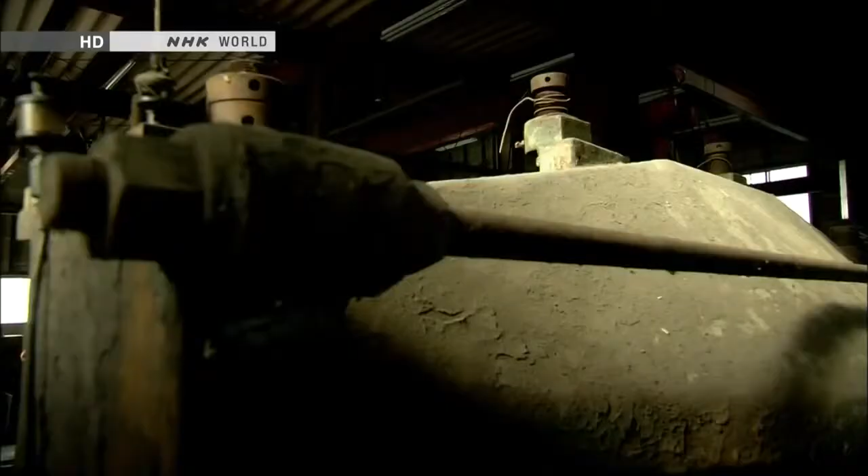In a workshop near Mount Fuji, a curious being has appeared. It's 3.8 meters tall and weighs 4 tons. It is a giant humanoid robot named Kuratas.

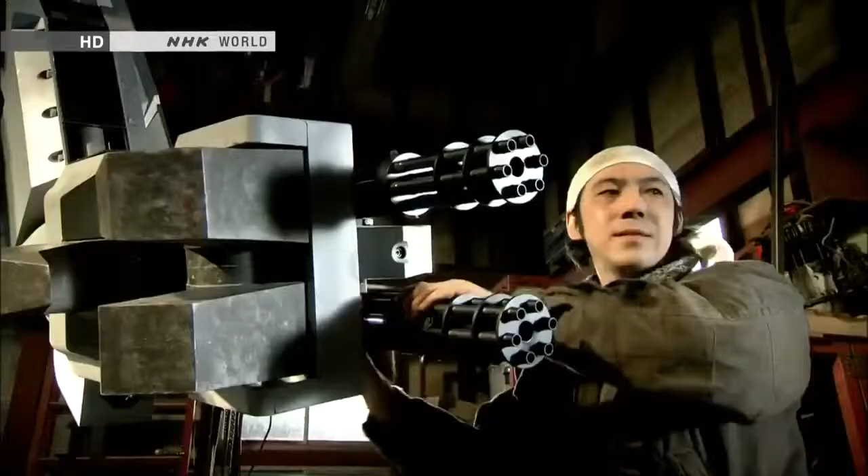Kuratas is a contemporary artist's creation. He holed up here for 2 years, building the robot with input from an expert.

He calls Kuratas a work of art, but it's a sophisticated piece of machinery. A person seated inside can control the robot, move its limbs, and grab things.

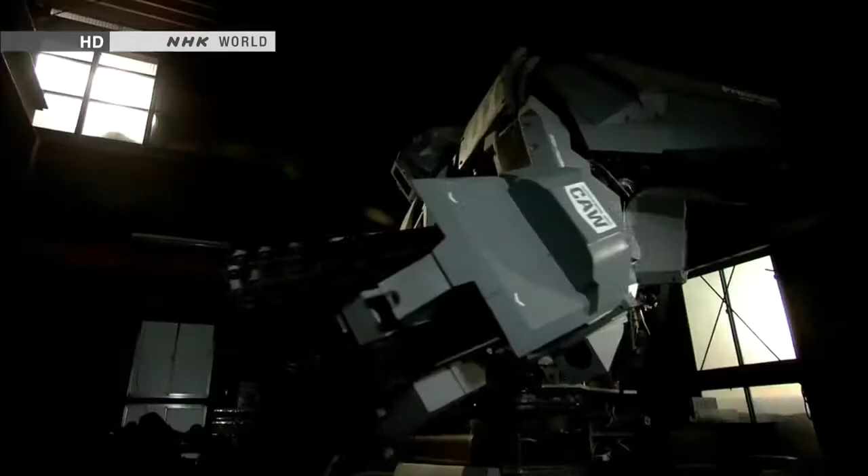The artist says he was inspired by robots in science fiction tales and animation. That vision sustained him as he worked in solitude.

Things that were once unthinkable are becoming real. How will robots evolve? Well, military applications could be one option. They'll probably become more and more like humans. They could surpass us in strength and ability.

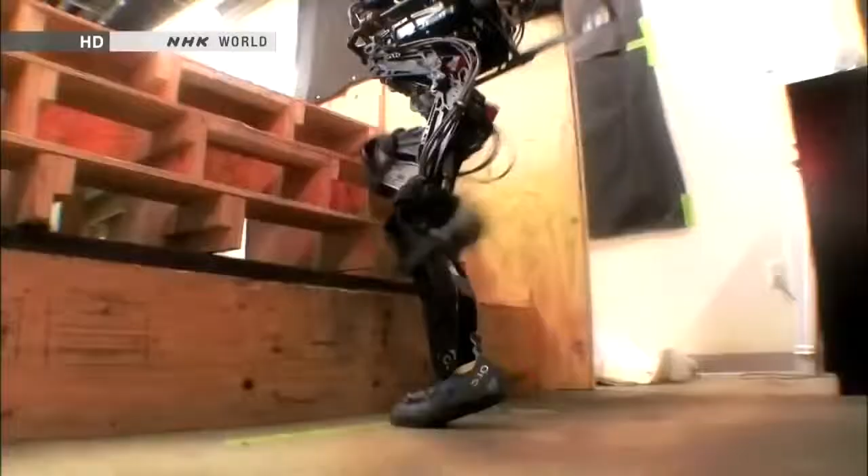People long dreamed of creating these extreme machines. Now, humanoid robots are here. They think like we do, move like we do, and even sacrifice themselves for us.

We want our robot to change society, because robots must be useful. Electronics and computing, progress in vision systems, there's many pieces of it. We will see much more capability continue to grow.

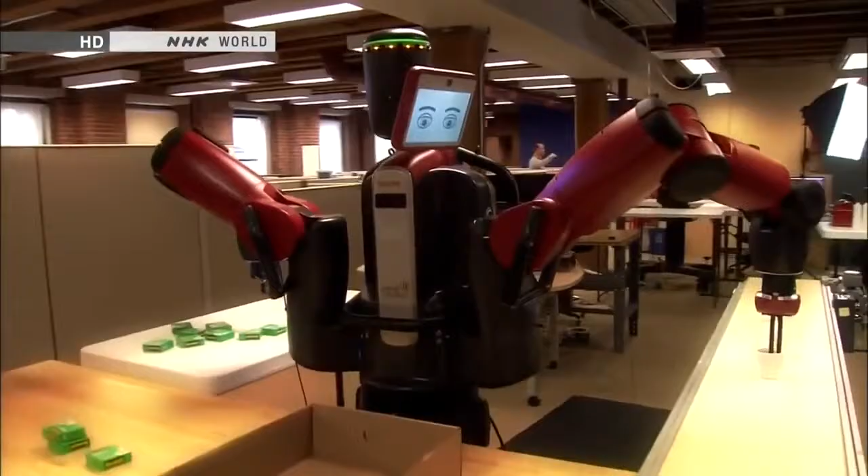Since the Industrial Revolution, people have entrusted some jobs to machines. But there may come a day when humanoid robots do much more complex jobs. Then, what will people do?

You'll see more and more robots doing things in society, whether it's manufacturing or service applications or home healthcare applications. The key will be skillfully dividing labor between humans and humanoid robots.

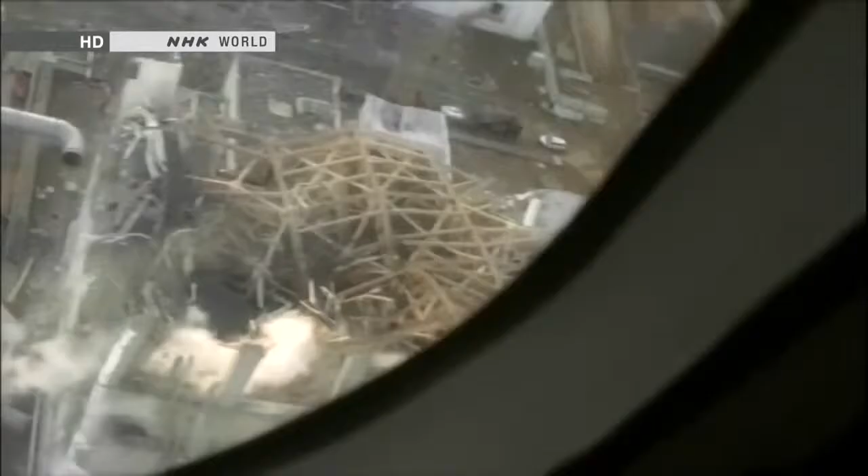The disaster that hit Japan in March 2011 accelerated efforts to develop robots with human traits. The Fukushima nuclear accident left people powerless.

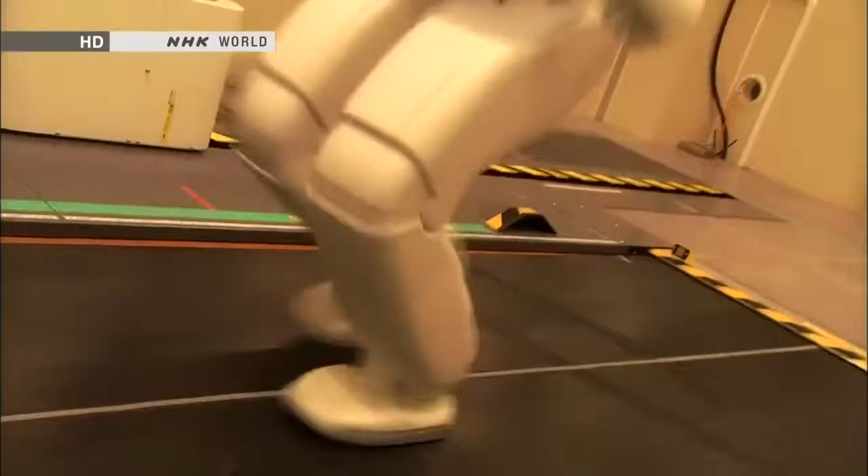Robots can take over when things become dangerous. They can plow through rubble, climb ladders, even make repairs. People are turning to humanoid robots to handle all of these tasks.

We're eager to launch it soon to end the crisis. By joining forces, we can make a truly useful contribution.

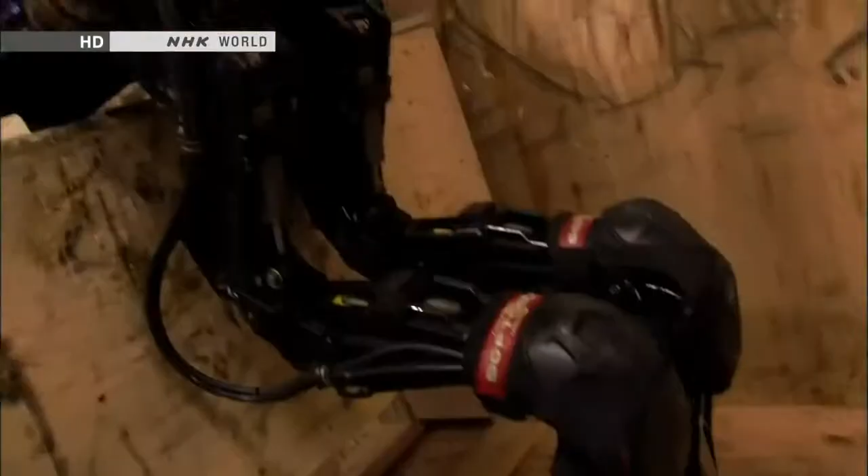Only a humanoid could do it. The day will come when robots will really assist mankind. The nuclear disaster in Japan sparked explosive advances in humanoids at the front line of robotics development.

This program explores the future that's fast approaching.

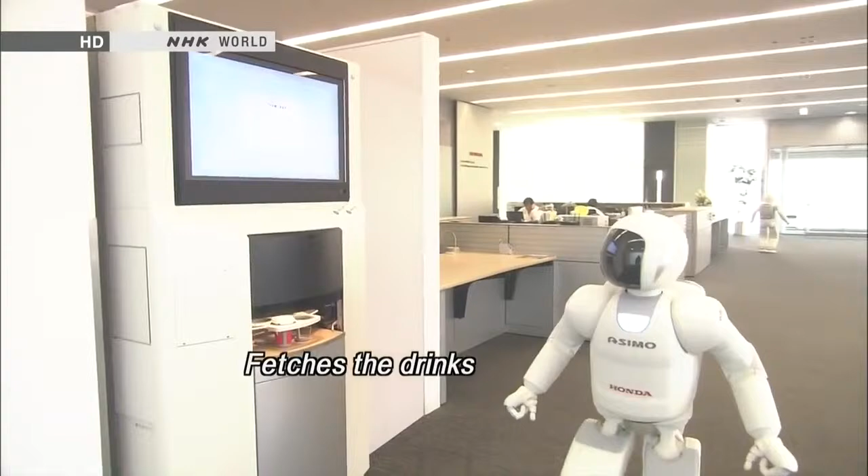Asimo was created by Honda's research and development subsidiary. We were allowed to film their top-secret robotics laboratory.

Japan is a worldwide leader in the development of humanoid robots. Asimo is the country's crowning achievement. Engineers continue to make improvements.

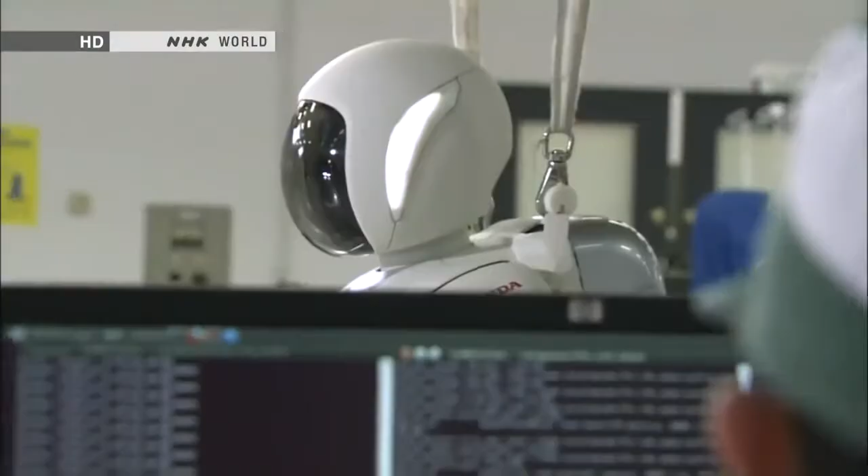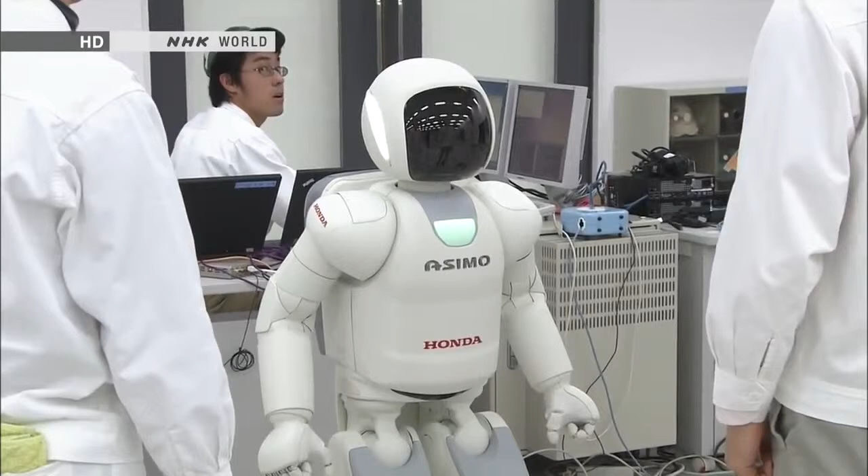Asimo's most innovative feature is its advanced intelligence. The robot can think and act on its own without human intervention. That's made possible by sensors that replicate our 5 senses.

Asimo's head contains 8 microphones. It uses them to listen and engage in conversation.

Asimo's artificial intelligence analyzes a vast array of information. That's how it understands people's requests and takes appropriate actions.

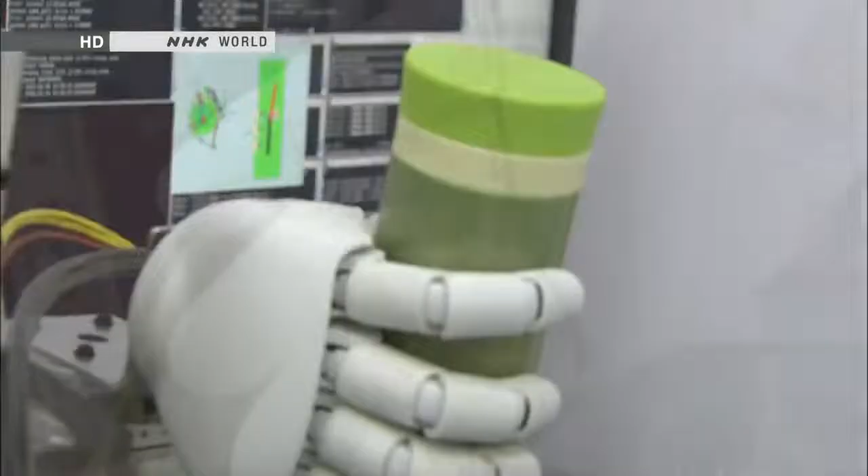Asimo also has a sophisticated sense of touch. Its fingers can make subtle movements, like a person's. Sensors are embedded in the fingertips, too. They can gauge the hardness of an object, like human fingers do.

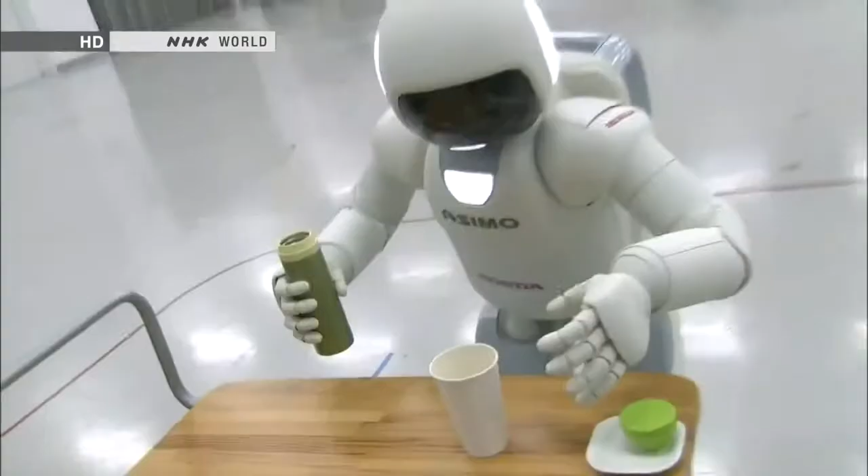Most robots use a fixed amount of strength to grab things. But Asimo exerts more power to open a tightly sealed water bottle and less when holding a paper cup. Its artificial intelligence uses information from the fingertip sensors to adjust the grip.

The developer's ultimate goal is for Asimo to be a valuable partner that coexists with humans. The engineers who created Asimo all grew up watching animated shows about robots, such as Astro Boy, Doraemon, and Gundam. They dreamed of someday making their own.

Satoshi Shigemi is the development team's leader. He has been designing robots for the past 16 years.

From the beginning, we wanted to design a robot that could help people. To realize that dream, we're constantly asking ourselves, what kind of robot would be able to change society, make people happy, and make life easier for people around the world?

Our idea is to create a robot that will change how people live. We're working through the technological issues, one by one, in order to reach that goal.

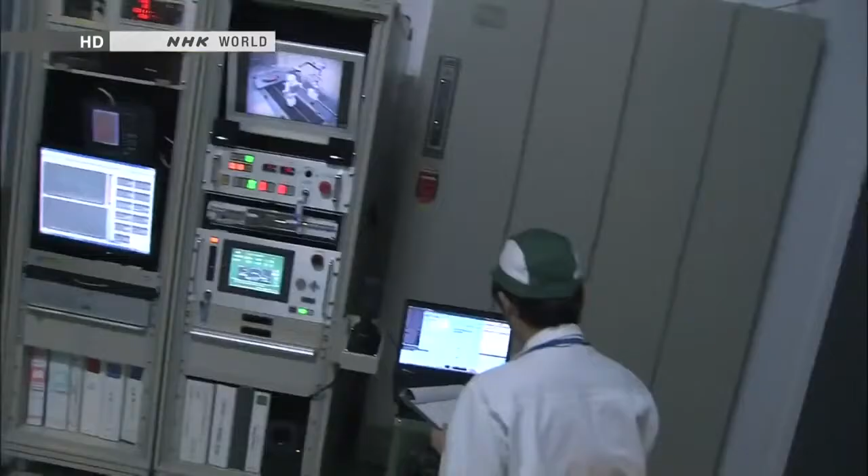Asimo's advanced physical capabilities are revolutionary. The robot can walk and run. It can reach speeds of up to 9 kilometers an hour.

For robots, walking is much easier than running. When running, both feet momentarily leave the ground. Balancing in midair is no easy task.

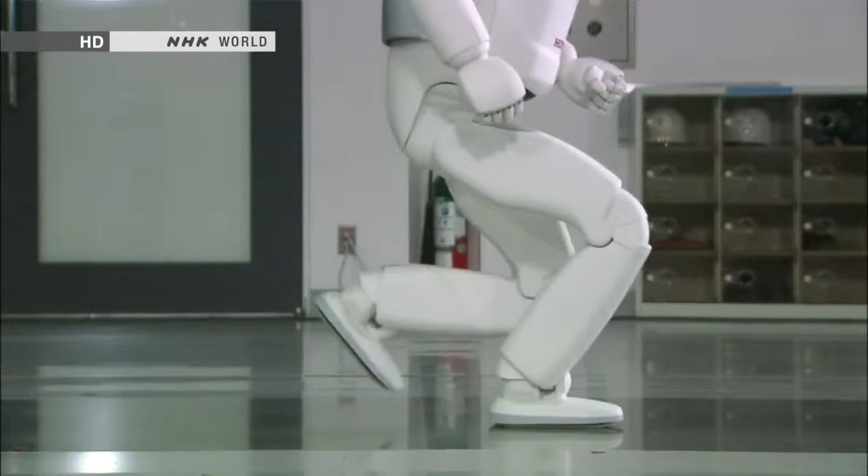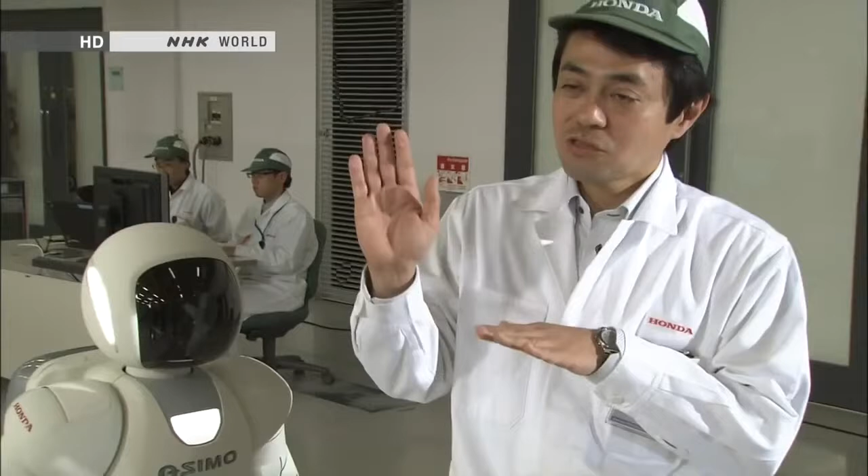Maintaining posture while jumping or floating in the air was a major technological breakthrough. Asimo leans its upper body slightly forward to maintain overall balance. It goes forward straight in the air.

Sensors in Asimo's waist measure the robot's angle. It leans slightly to compensate, forward or back, side to side. That's how it stays perfectly balanced in the air.

Asimo has been evolving ever since development began in 1986, much like a growing child. But something happened that made researchers realize Asimo's real-world limitations.

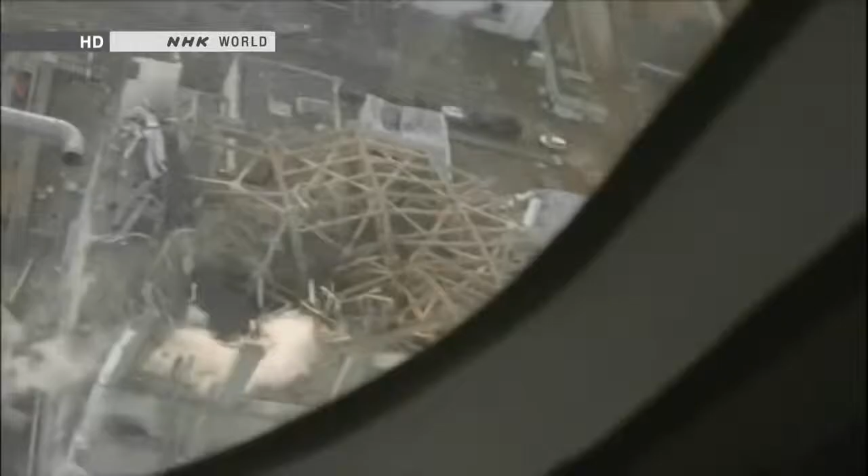It was the accident at Tokyo Electric Power Company's Fukushima Daiichi nuclear plant. The damaged reactors released radioactive substances, making it difficult for humans to deal with the crisis. People needed something that could confront the dangers and bring the plant under control.

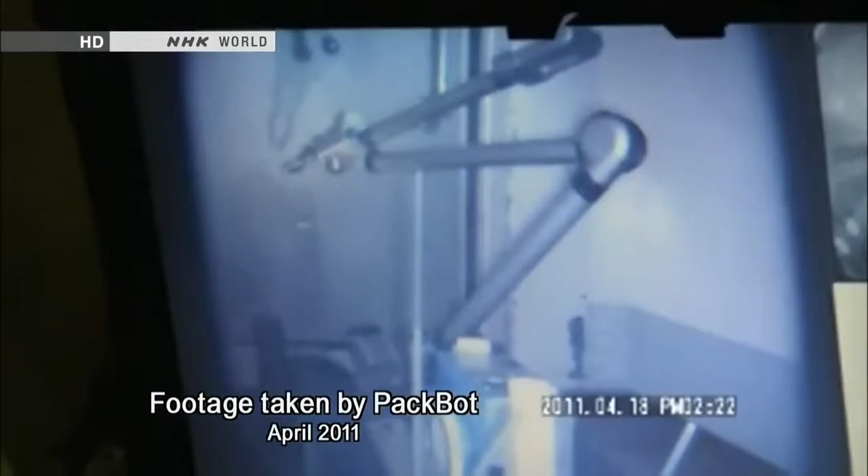Robots. Japanese officials sent a request for robots developed by the US military. The robots were sent to Fukushima in April 2011. They recorded images inside the damaged reactors.

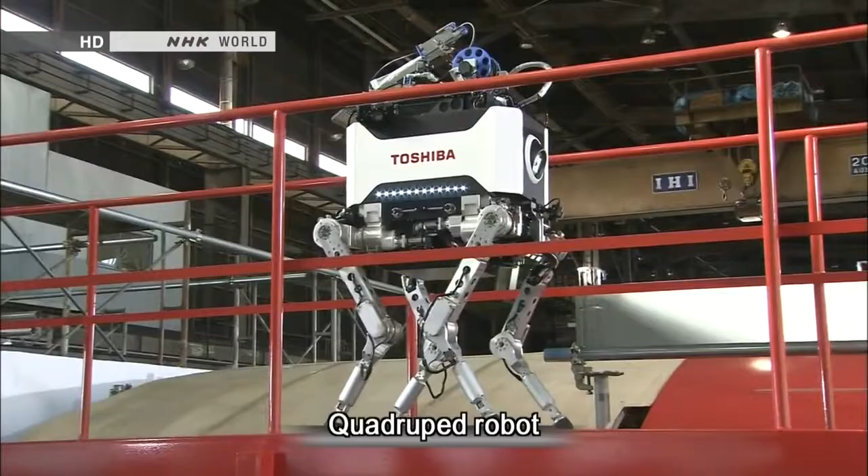Since then, a variety of Japanese robots have been enlisted as well. Robots have proven to be useful, but 2 years after the accident, they're only used for inspections. They're not able to do all the work of humans.

What about Asimo? Right after the disaster, people flooded Honda with phone calls and emails asking the company to send Asimo to the Fukushima plant.

But Asimo wasn't up to the task. It could move nimbly over an office floor and other flat surfaces, but large vertical gaps and obstacles were a different story.

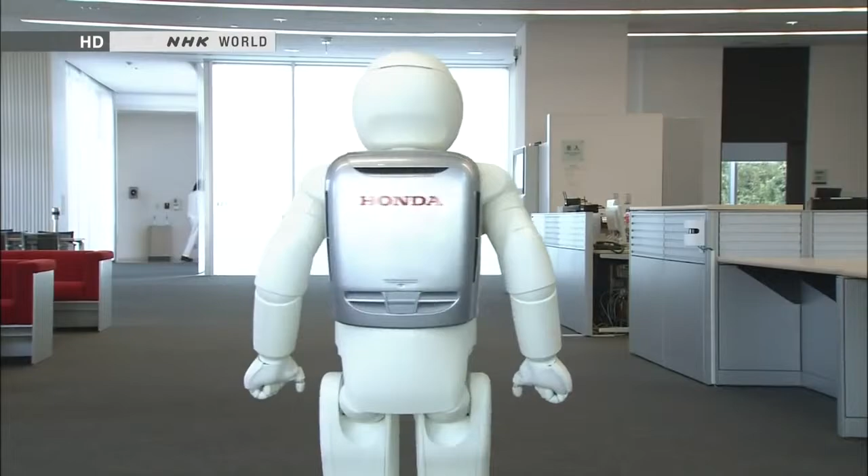We heard from many customers. We ourselves regretted that Asimo couldn't be of help. It was obvious that Asimo we had built wasn't ready for real-life action. We realized right away that we needed to make something different, something new that could offer immediate assistance.

Honda wasted no time. Company officials offered to create a robot free of charge to assist TEPCO in the recovery. TEPCO accepted. Officials asked for a robot that could open or close valves inside the nuclear plant.

We wanted to flush out radioactive materials that remained inside the pipes and bring down radiation levels in the facility. That was our first goal. Unless we opened or closed the valves, the area would remain highly radioactive, and that would prevent workers from entering the facility and impact the entire decommissioning schedule.

How many valves are there? Each unit has from several thousand to tens of thousands of them.

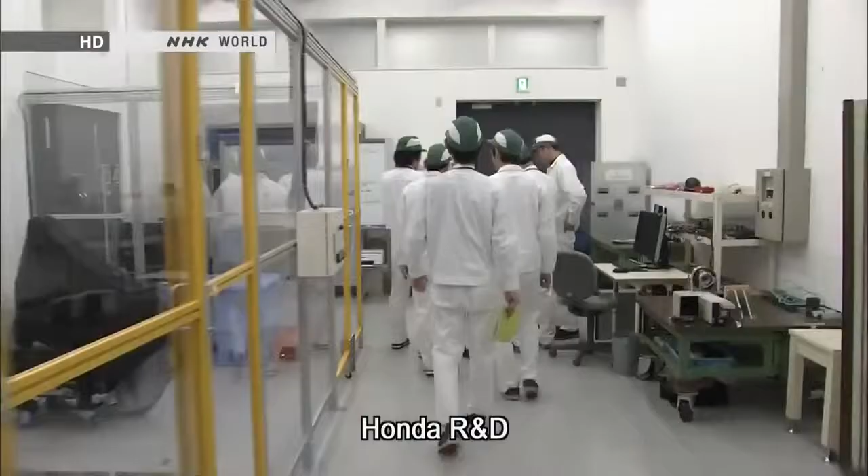In July 2011, 4 months after the accident, Honda began designing a robot for use at the nuclear plant. Members of the Asimo team were put in charge of the project. A humanoid robot would take too long to build, so engineers focused on making a robot specifically for operating valves.

Asimo was crucial to their efforts. Its ankles employ advanced balancing technology. Developers reasoned that using it would allow the new robot to work inside rubble-filled reactor buildings.

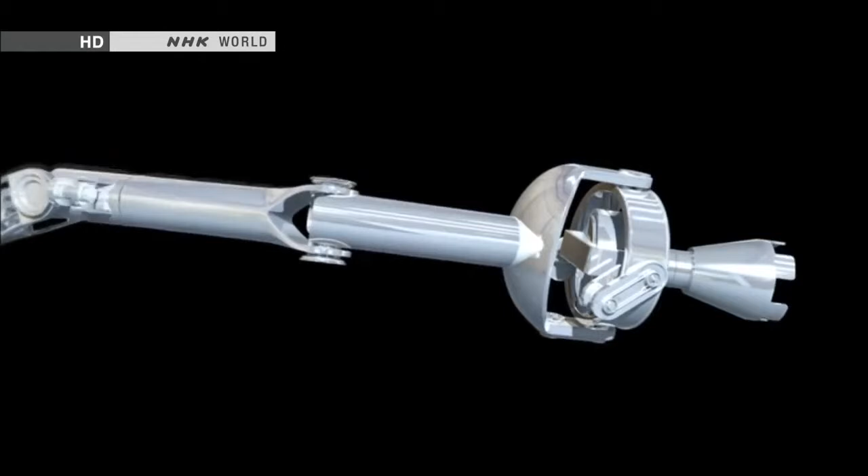The team worked exceptionally fast, completing a prototype in just 4 months. They turned Asimo's leg into an arm for operating the valves. Even when the base moves, the arm remains steady.

So far, so good. Officials from TEPCO evaluated the prototype at the National Institute of Advanced Industrial Science and Technology. The government-backed group for cutting-edge research contributed to the development effort.

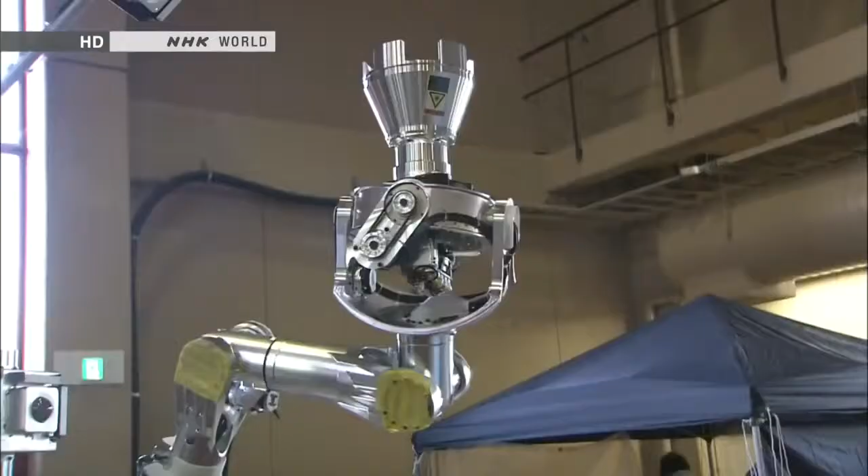A TEPCO official couldn't take his eyes off the robot's movements. We may be quite demanding. That's okay. We might be quite direct. The test is designed to replicate conditions inside the nuclear plant.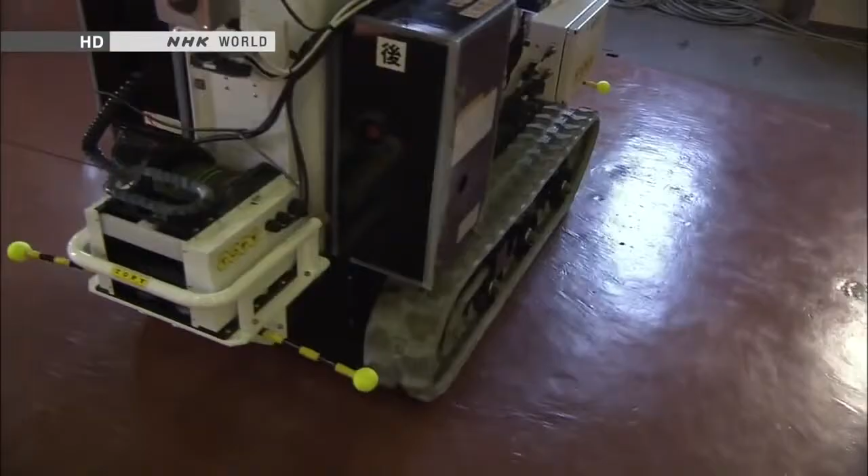The robotic arm is remote controlled. Testers send the arm toward one of the valves. There are a number of unknowns, including the condition of the valves. They may have rusted since the accident. A valve might break if the robot applies too much force, or it might not budge at all.

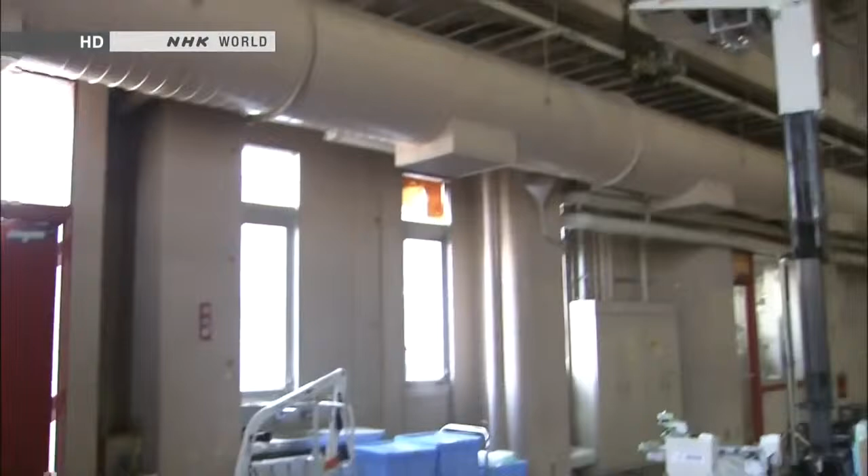The robot uses just the right amount of force and turns the valve on the first try. It's passed the test. This robot can do more than inspections. It could help in the recovery effort.

From what we've seen, the robot seems near perfect. We want to use it as soon as the need arises. It's important that we quickly do what we can to make that possible.

The Fukushima accident also encouraged U.S. developers to design emergency response robots. Department of Defense officials have spearheaded the effort. Before, they had shown little interest in humanoid robots. Now, they view them as vital for disaster response.

The architect of the new strategy is Gill Pratt of DARPA. He oversees funding for leading-edge research at the Department of Defense. There are many aspects of disaster response in Fukushima that inspire people in robotics to work on new capabilities.

If they were able to take action during those first 24 hours, then the first reactor maybe would not have blown up, in an environment too dangerous for a person to do. What's important to us is that the robot is compatible with human environments, compatible with human tools, and compatible with human operators without special training. As a result, the easiest form that comes to mind is the human form. DARPA is backing the development of a humanoid robot for catastrophes, such as nuclear power plant accidents.

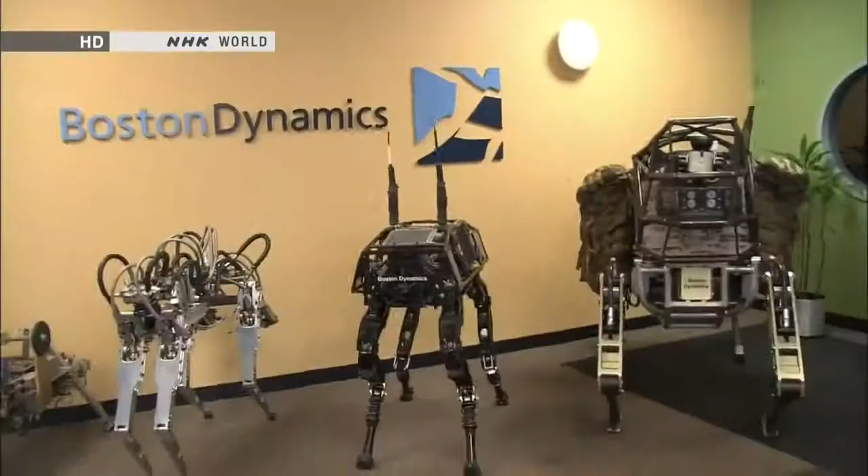This company is leading the development work. It has already built several military robots. Okay, I'll show you the current status of the robot.

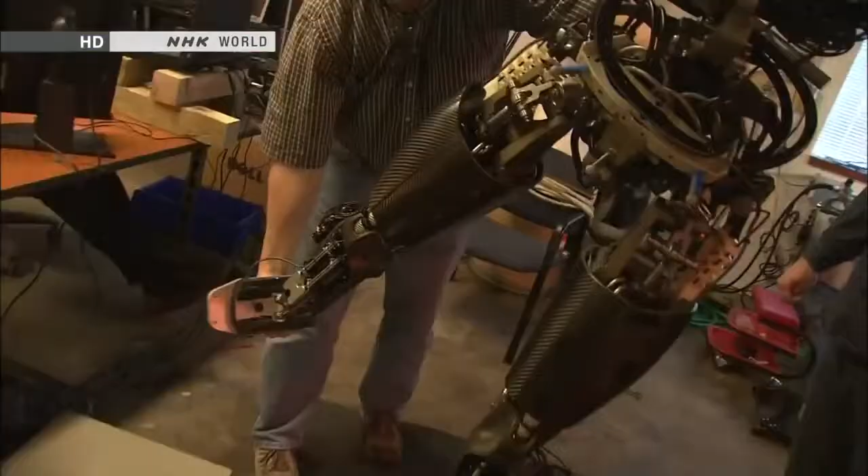This is the first American-made humanoid robot for disaster response. It's called Atlas. Before, U.S. designers had focused on robots with specialized functions.

Why the sudden interest in humanoid robots? Traveling over debris, prying open valves, using tools for repairs - performing multiple tasks like these is impossible for specialized robots. Crises also require robots that can navigate doors and stairs. Humanoid robots are ideally suited for such situations.

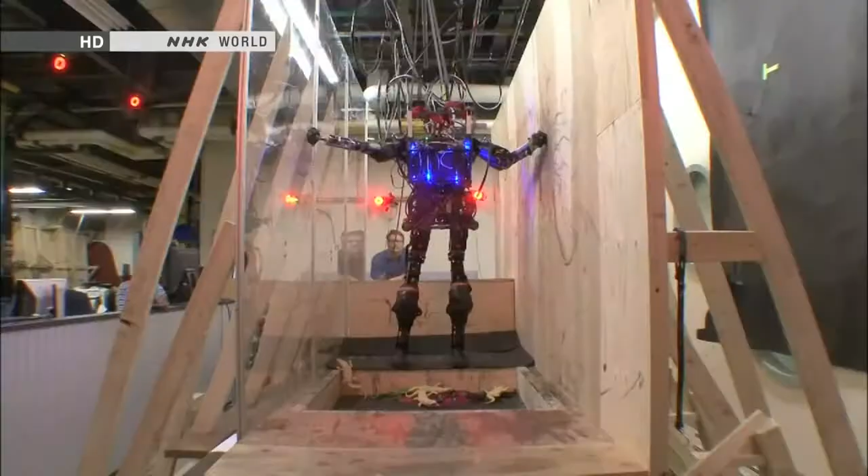Tests of this prototype were going smoothly. It can easily climb stairs and jump from a height of nearly 1 meter, and can negotiate obstacles using its arms and legs. It can already handle more demanding environments than Asimo can.

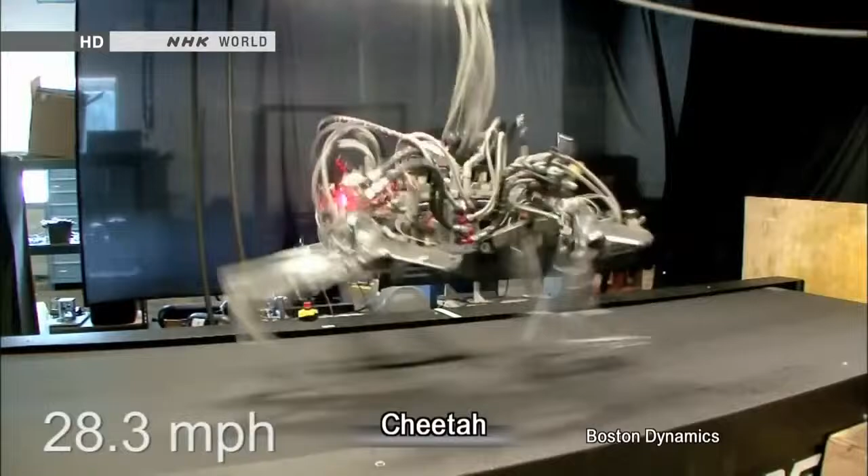Atlas is loaded with technologies originally designed for military robots. A quadruped robot called Cheetah can race through a battlefield at 45 kilometers an hour. LS-3 is for transport - it can carry heavy supplies for soldiers.

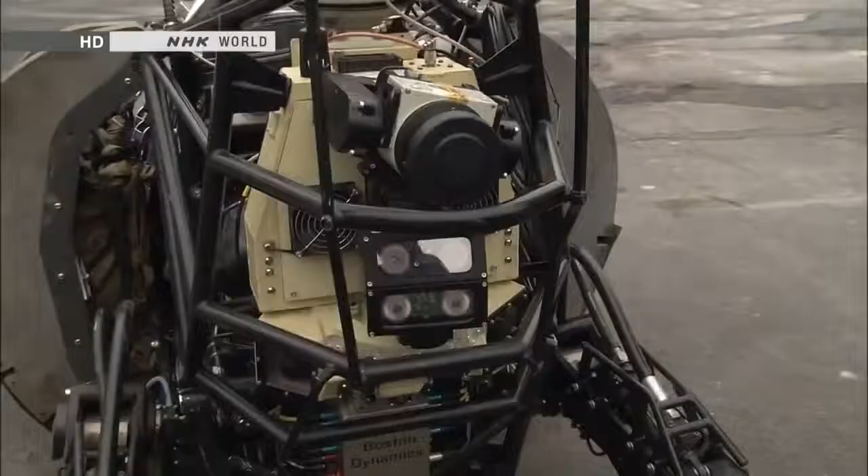The ferocious-looking robot gets its strength from a powerful hydraulic drive system. A hydraulic device can be small, yet quite strong. The black cables convey hydraulic power to the legs, generating the brute force required for harsh conditions on the battlefield.

A web of hydraulic cables covers Atlas's body. They form a muscular suit of armor for clearing debris.

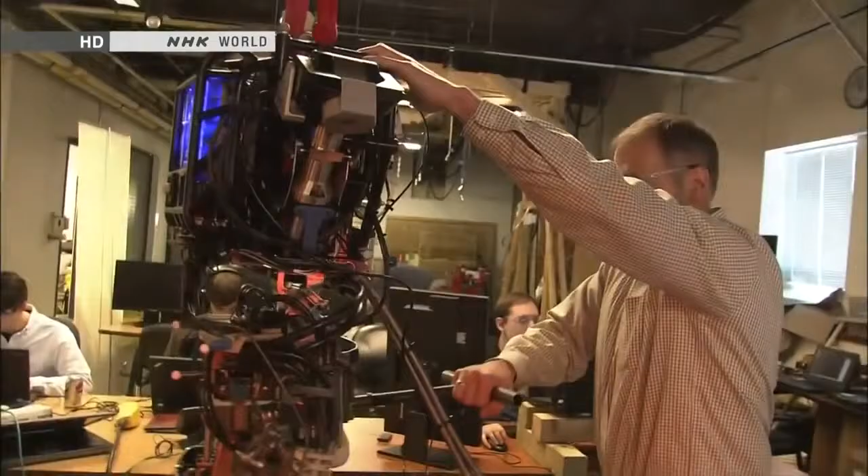Another important technology comes from military robot engineering. This machine's joints have a wide range of motion, allowing for flexibility that humans can't achieve. Atlas's joints are capable of moving in 28 different ways. Atlas can crawl through narrow spaces and withstand sudden shocks.

But then we have the knee - this has 3 in the hip, just like us. This way, and then this way. I am very impressed with the number of degrees of freedom. It will be able to do these human-compatible tasks without a lot of the limitations that other robots have.

Engineers will combine Atlas's rugged body with sophisticated artificial intelligence that's almost near completion. They aim to complete the robot by December of next year.

One reason you see humanoid robots is because there are people working who are really interested in robots as an entertainment thing or as a performance thing. I think that's different - we're much more interested in basic capabilities for emergency response, rescue. So I don't think Asimo has been designed to do those things yet.

U.S. engineers stepped up their efforts to develop humanoid robots after the nuclear accident in Japan. Japanese researchers are embracing the same mission.

In November 2012, robot engineers from around the world gathered in Osaka for an international conference on humanoids. Gill Pratt from DARPA was one of the participants.

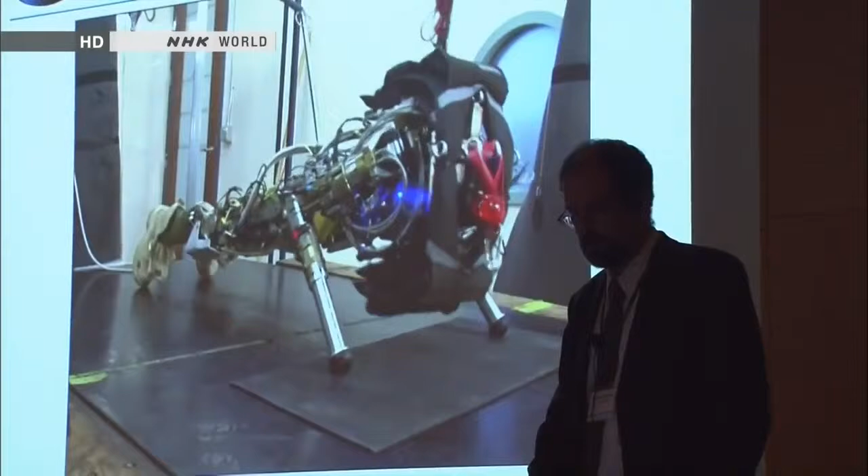They have 2 degrees of freedom, not 1. The Robotics Challenge is a competition to develop emergency response robots for major disasters like Japan's.

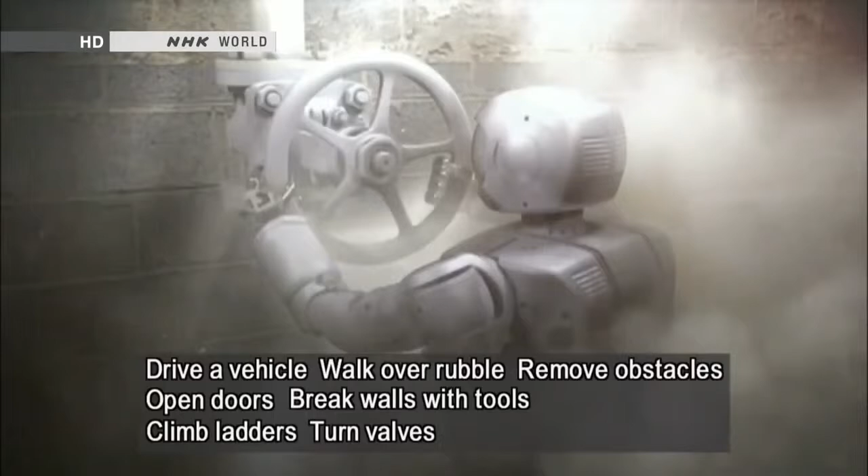The challenge consists of 8 tasks: driving a vehicle to approach a disaster site, walking over rubble, removing obstacles, opening doors, using tools to break down walls, climbing ladders, turning valves, and making repairs.

A single robot must complete all 8 tasks. The development period is 2 years. DARPA will provide contestants with funding of up to $4 million.

DARPA has received over 100 proposals from research groups worldwide. They include renowned organizations like NASA and MIT.

Japan is at the forefront of humanoid robotics engineering, yet its researchers hesitated to throw their hats into the ring.

So actually, to me, it's difficult not to see that some of the results of the DRC are going to be used to advance, as you say, advanced military technology. The DRC is about developing robots that I believe wholeheartedly are completely impractical for military purposes, for offensive military purposes.

Will the technology that we come up with find its way into military systems? Probably yes. But I guarantee you that if you work on a robot for healthcare, there's a chance that technology will also find its way into military systems.

The members of one Japanese research institution wanted to take part in the competition.

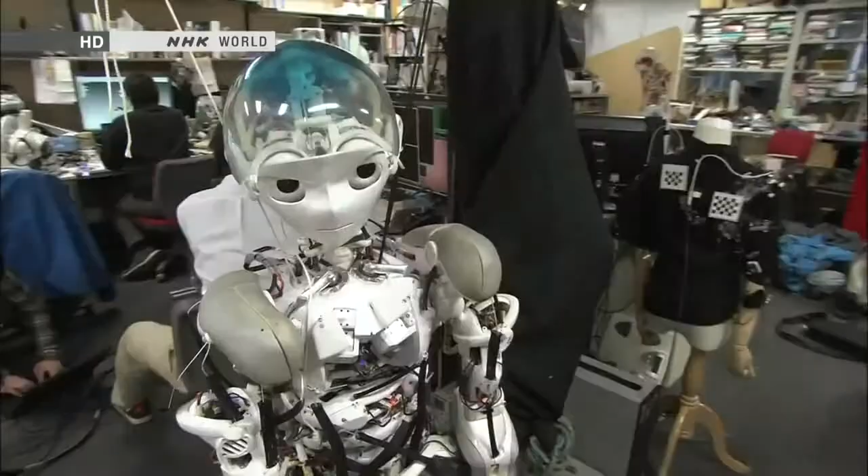They worked at the University of Tokyo's robotics lab. Researchers there, along with those at Honda, are global leaders in robotics engineering. But they faced a major obstacle to competing: the university bans military-funded research.

Three researchers made a decision. They told the university they were leaving. Then, they decided to set up a venture company and enter the DARPA Robotics Challenge.

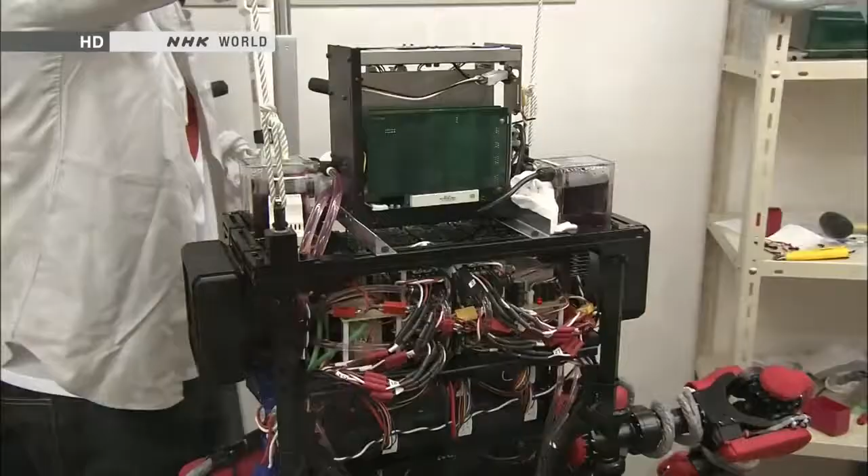They couldn't shake the feeling that they should leave their quiet university lab and help resolve the nuclear crisis.

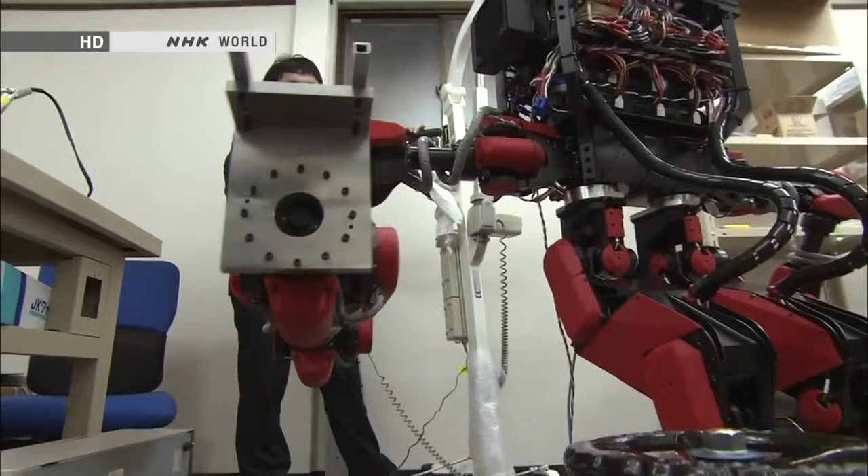Six months after launching their venture, the team had just completed a prototype with help from university graduates. Its long arms can exert 10 times more force than those of conventional humanoid robots.

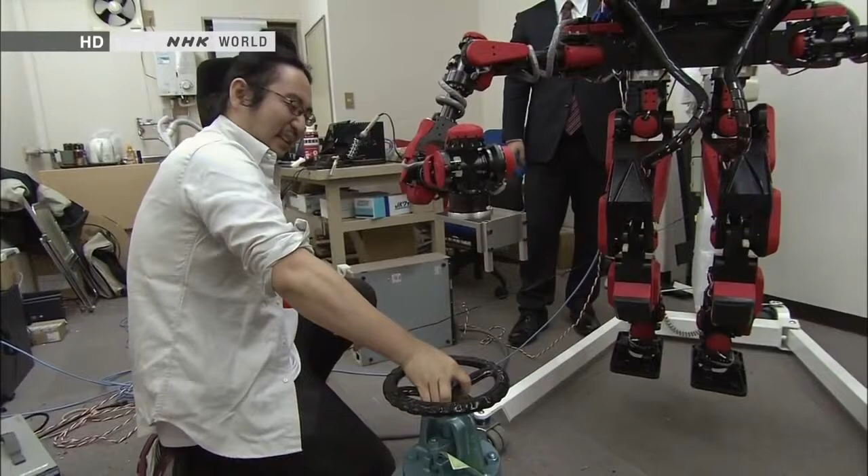It's too tight to turn with one hand. It can easily turn a valve that's too tight for a person to turn.

The strong force comes from a large electric current that pushes the motors to their maximum limits.

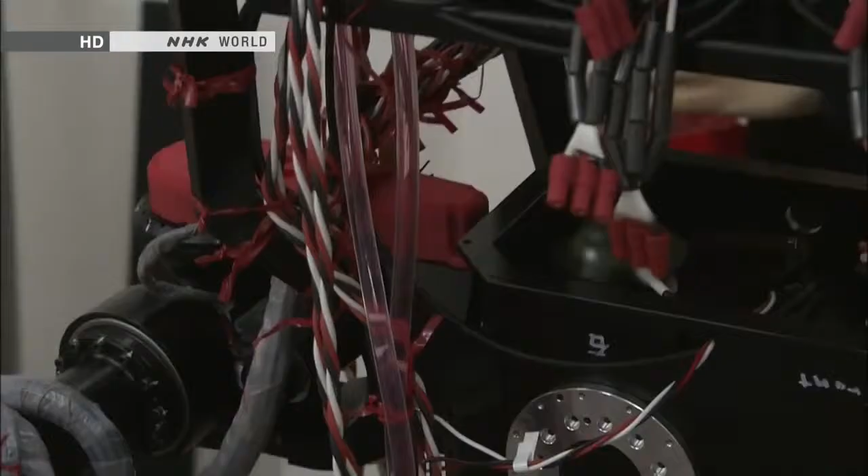A reddish fluid circulates through the robot's body. The fluid serves as a coolant that keeps the motors from overheating. The cooling system should enable the robot to perform hours of grueling work at disaster sites.

The time has now come for the developers to apply their years of research to the real world. A nuclear crisis has happened here in Japan. Radiation is escaping. Researchers in every field must wonder at least once if the technology they've been working on could help resolve the crisis. By joining forces, we can make a truly useful contribution. It's with this in mind that we decided to enter the competition.

One country is quickly catching up with Japan in humanoid robotics: South Korea. KAIST is a government-funded lab for the advancement of science and technology. Researchers there were among the first to express interest in DARPA's Robotics Challenge.

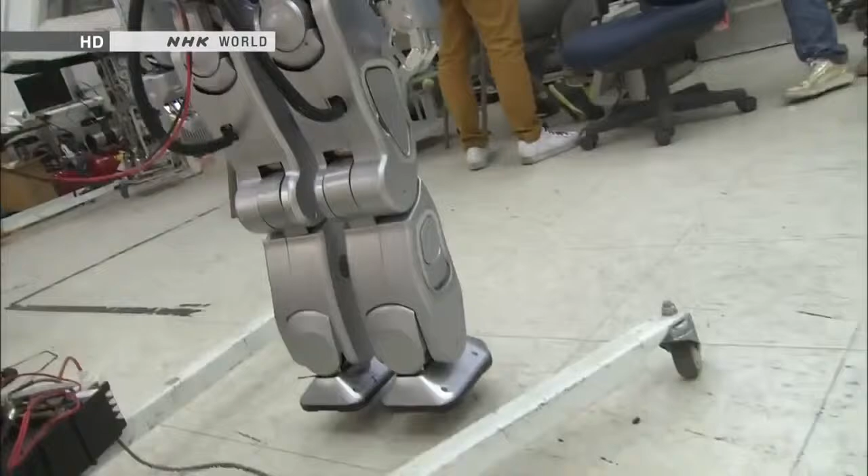This humanoid robot is called Hubo. It's modeled on Asimo, which Honda spent 14 years developing. Hubo was built in just 5 years. Hubo deftly manipulates its hands, and it's also good at dancing. Its moves look just like Asimo's.

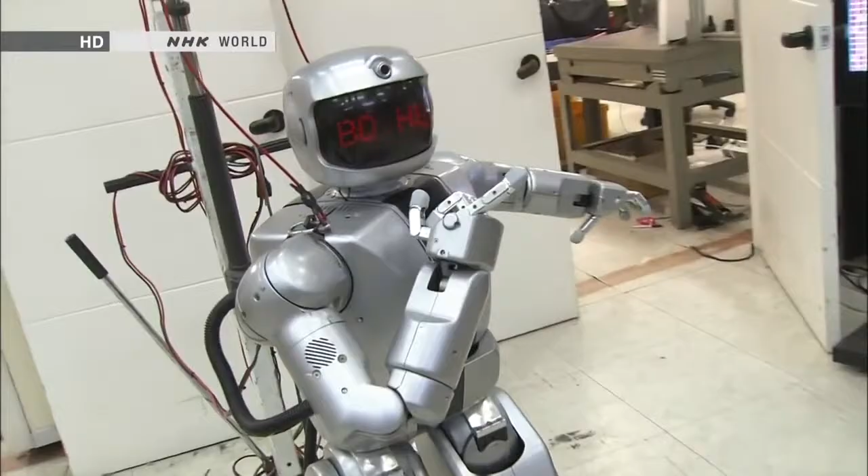Hubo has been undergoing a major upgrade ahead of the competition. It can now bend backward at the waist while walking to handle all kinds of environments. It can quickly pick up tools. The tests were going well.

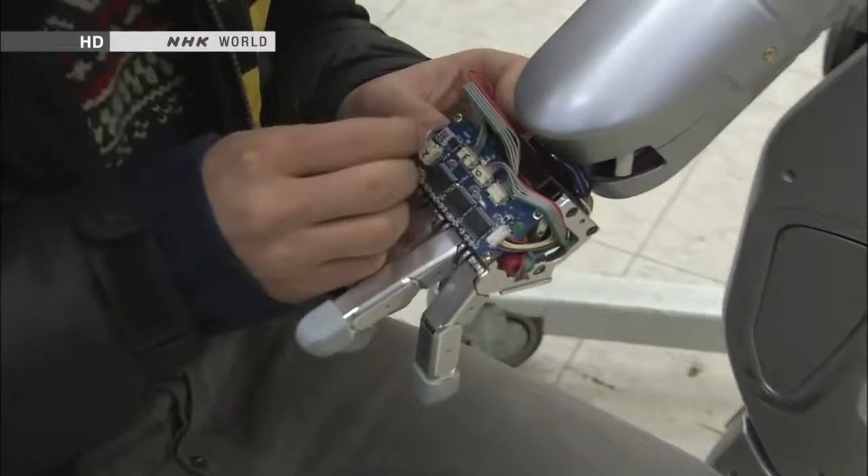People have always compared Hubo to Asimo. Engineers now had a strategy to get ahead of the Japanese developers. They decided to publish certain details about Hubo's design and pursue joint development with researchers at other institutions. One could say that this space inside Hubo's chest captures the heart of their thinking.

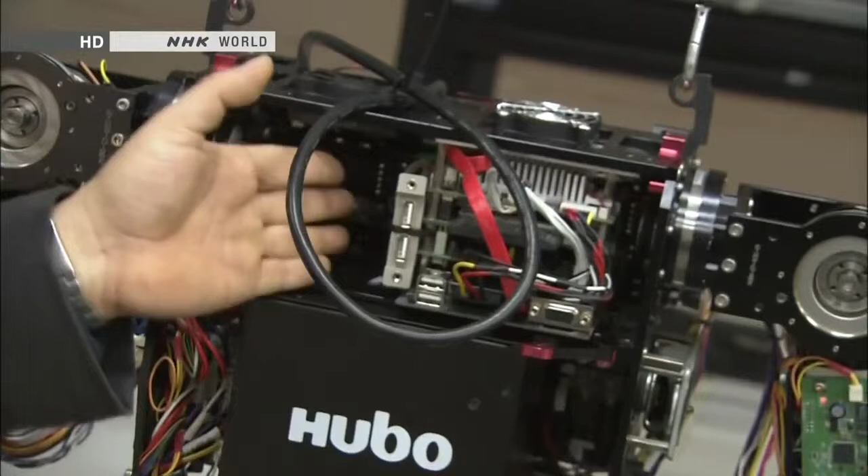It's empty now, but this is where artificial intelligence will be installed. It's removable. Hubo does not yet possess artificial intelligence. Its motions are as sophisticated as Asimo's, but Hubo's movements are all pre-programmed.

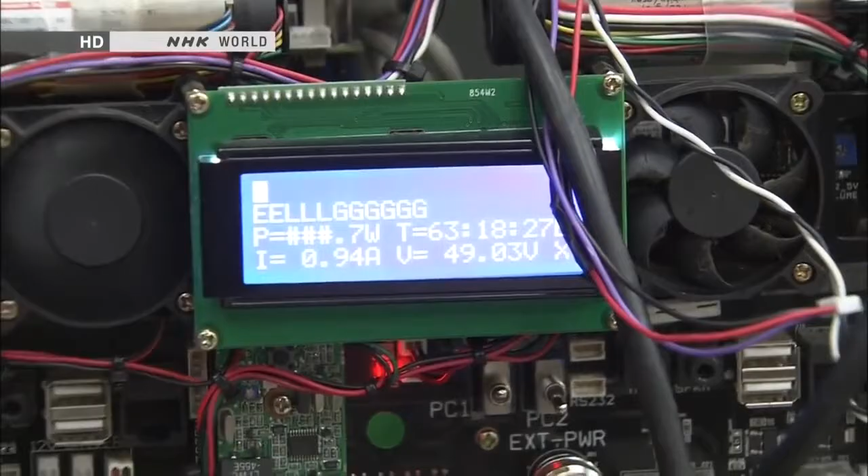U.S. universities that lead research into artificial intelligence will develop a brain for Hubo. The stage has been set for a joint U.S.-South Korean team to compete in the DARPA Robotics Challenge.

Sharing is the key to making technological advancements. That's true in South Korea and in other places too. Research shouldn't be confined to one place. People developing humanoid robots elsewhere are too close-minded.

Researchers at Honda were also invited to enter DARPA's competition. But they declined. Their energies were focused on designing a robot to tackle Japan's nuclear crisis.

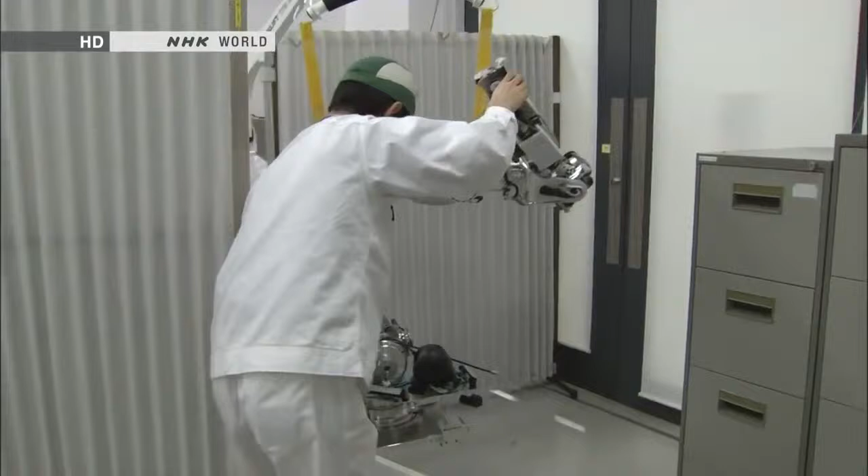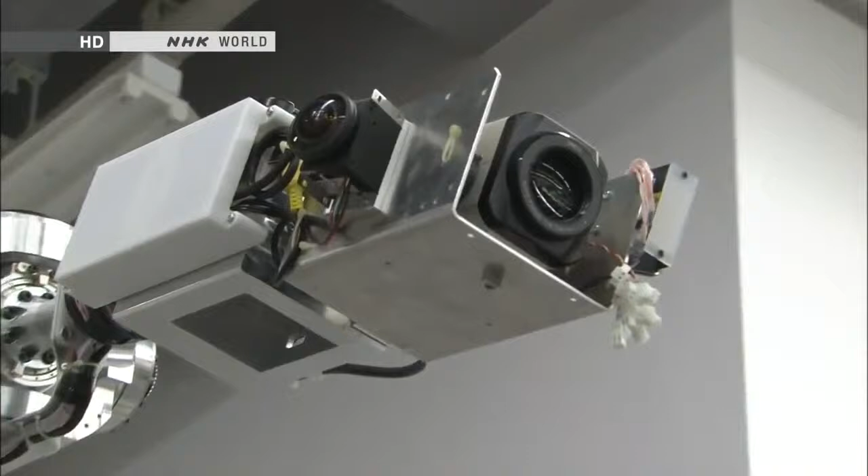Nearly a year has passed since Honda's robotic arm passed evaluation tests, but the device has yet to be deployed to the nuclear disaster site. That's because officials at TEPCO requested a change in specifications. Engineers have replaced the valve-turning hand at the end of the arm with a camera.

TEPCO had changed its plan. Officials decided to put priority on assessing conditions inside the plant's facilities. They said it was too early to have robots work on valves. There wasn't even a recovery plan in place when we were working out the valve manipulation tasks.

Confusion also prevailed at the site. We were expecting valve work to begin 2 to 3 months after the disaster. But the timing has ended up being later than what we'd assumed 1 month into the crisis.

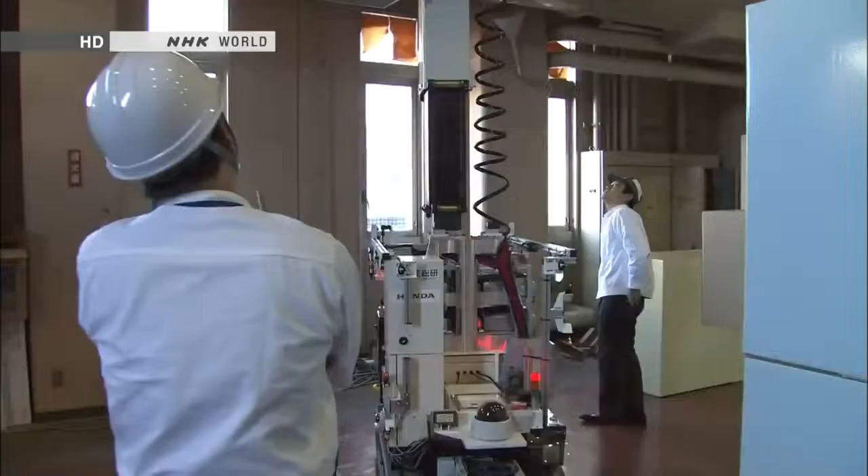The robotic arm will soon be sent to the accident site. It will provide the first images filmed from high up. The robotic arm was not the end of Honda's efforts. Its engineers had another secret mission.

They would develop a new humanoid robot, an updated version of Asimo for use in disasters. The site where the Fukushima disaster took place is dark and off-limits to humans. Only a humanoid robot with both intelligence and motor skills could climb over the debris, get to the accident site, and perform the work of people. In other words, a robot like Asimo. Let's use our skills to make a humanoid robot that can tackle disasters.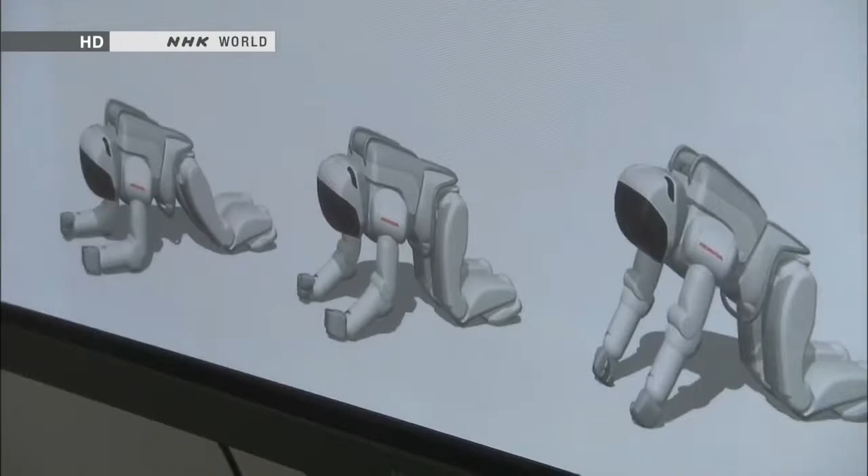Asimo's engineers were united by this idea. The robot they envisioned would not only walk, but also use its arms to crawl. It would use every means possible to reach its destination. A dramatic update would be necessary.

A disaster reduction robot would be useless if it couldn't get to the site. It's important to get to the scene no matter what. Disasters create all kinds of debris that crumbles easily or breaks when stepped on. It's because it's dangerous that robots replace humans. That's what makes them valuable. A robot that couldn't get to the scene would be totally useless.

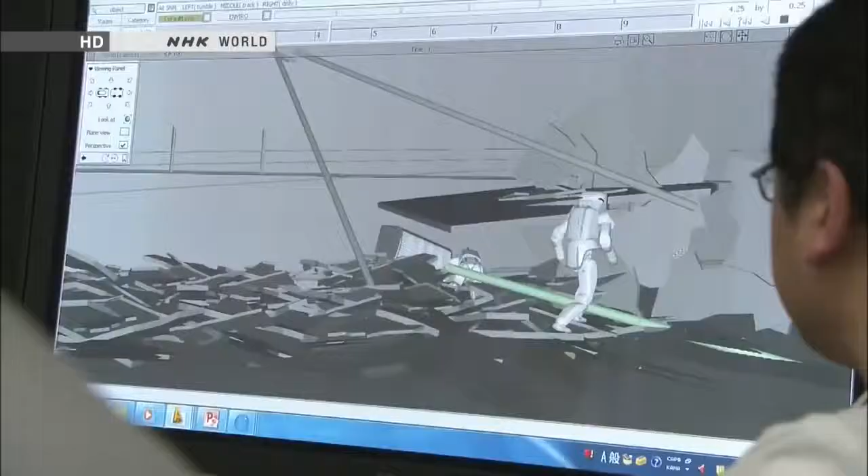Honda's engineers began developing robots in 1986 with the goal of making people happy. 27 years of research is now being put to the test. As we saw in the Fukushima Daiichi crisis, the bottom line is that robots can stand in for humans in places that we can't go to or that are too dangerous. I am committed to delivering what's needed, when needed, in the shortest amount of time.

The accident in Fukushima spurred the development of humanoid robots around the world. The disaster also prompted people to question the roles of humans.

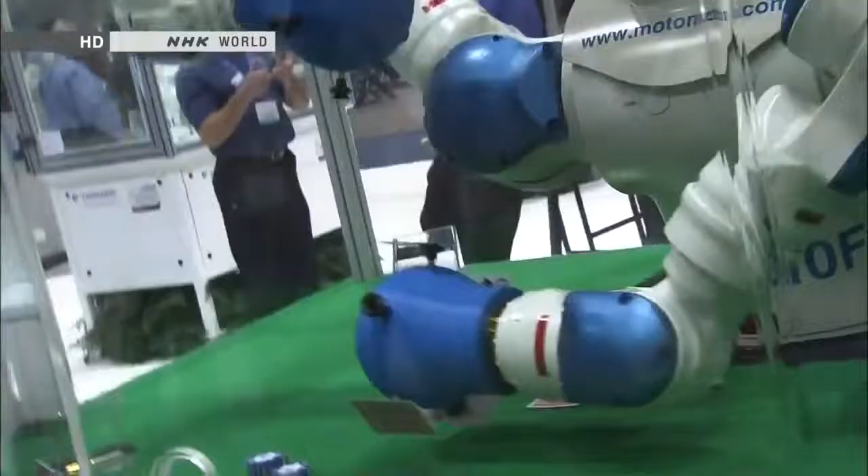One of the largest trade fairs featuring industrial robots took place in January. Global manufacturers displayed their latest models. Companies are developing more and more two-armed humanoids for industrial use. One new product at the event caught a lot of people's attention.

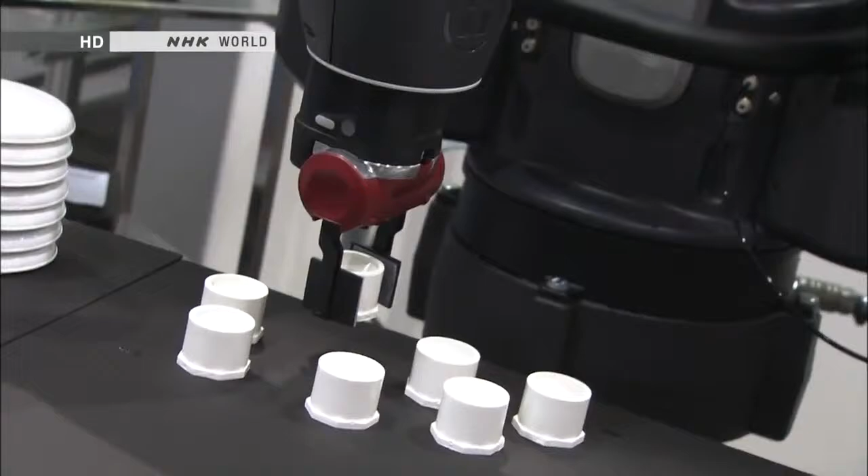Baxter was created by the inventor of a best-selling cleaning robot. It's equipped with sophisticated artificial intelligence. Baxter is designed to work side by side with people in factories and other settings.

The robot's most unusual feature is its ability to master a task in a matter of 5 minutes. All that's required is step-by-step manual instruction. No complicated programming is needed.

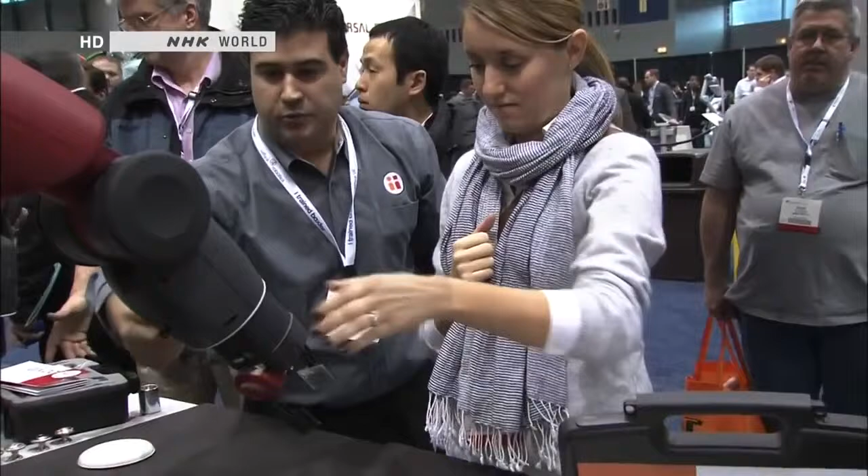Let's pick up this part. So you bring the arm to the part. Yep, just like that. So we have the part. Close the grasp. Yep. Grab the arm and bring it to the table.

And at this point, you're already able to do the task. So I can move that over there. It's going to look for the object.

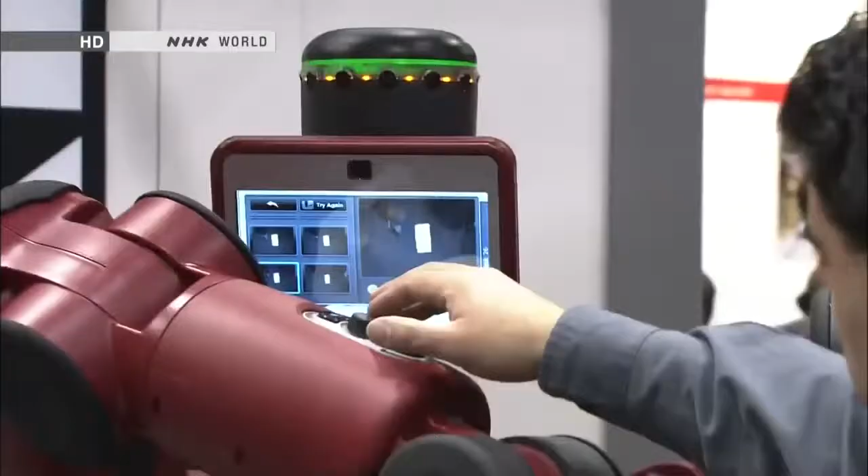The expression of the face on the LCD screen shows whether or not the robot has understood the task.

Baxter costs $22,000, a bargain for a humanoid robot. The maker says buyers can recoup their investment in several months and slash labor costs.

I'm very impressed with it. I work for a small manufacturing company, and we have some older employees who are looking to retire, and there's some tasks that Baxter could do for us very effectively. Plus, it would be cheaper than employing a person. It's not going to get tired. It's not going to need to stop. It'll keep running while everybody else is taking their lunch.

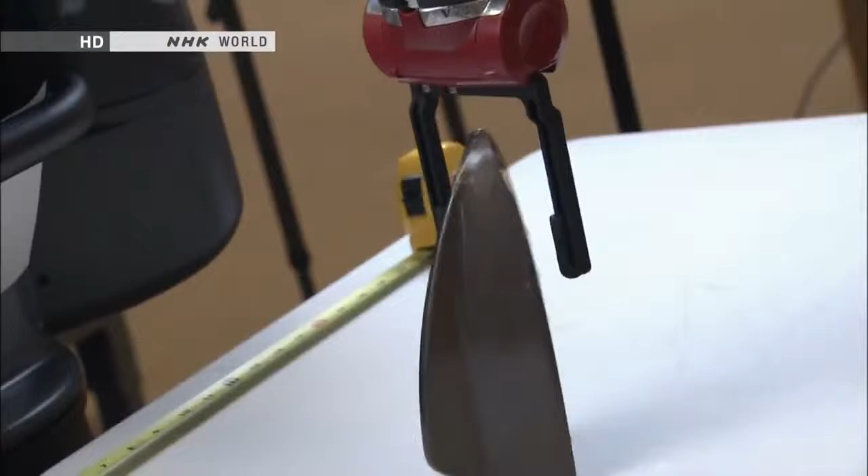The Boston-based manufacturer has a flood of back orders. Officials say someday Baxter will work at places like coffee shops, taking orders and grilling burgers. Eventually, they expect to have 500,000 U.S. customers.

Today we're focused on manufacturing, and there's a very big opportunity in manufacturing, but there's lots of other places a robot like Baxter could go. We had the Industrial Revolution at the turn of the last century. We've just gone through the computer revolution, effectively at the turn of the most recent end of the century. We are now into the robot revolution.

Will people and robots someday compete for jobs?

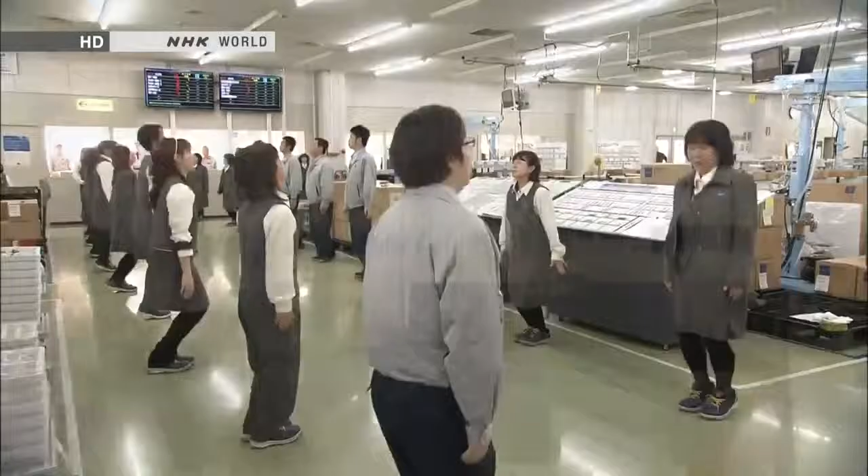At 8:30 one morning, a group of new employees takes part in daily morning exercises. They are 13 humanoid workers called NEXTAGE. This company began using the robots in earnest last year.

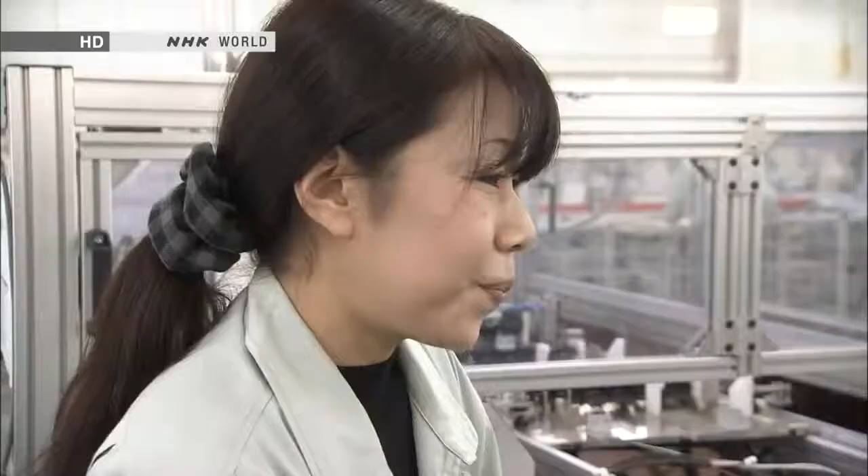They have 2 eyes and are just like humans. They're cute. This factory manufactures money sorting machines for cash registers.

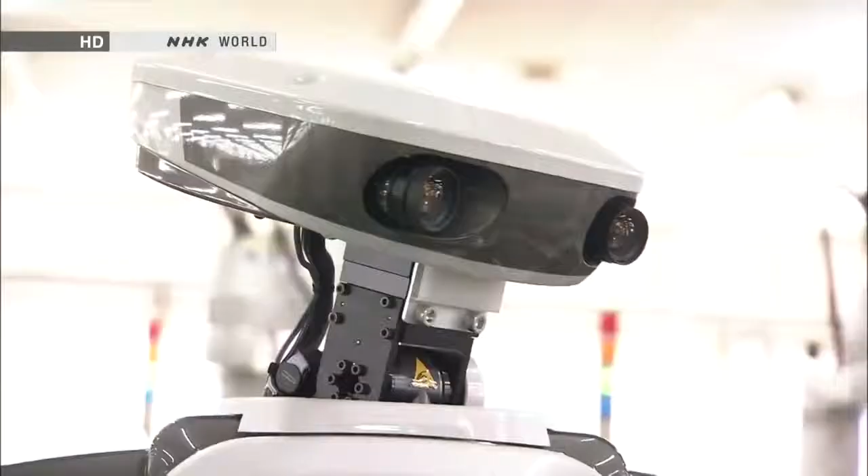The humanoids work on a production line that was previously manned entirely by humans. The robot visually confirms the parts set in place by a human worker. Then it begins its task.